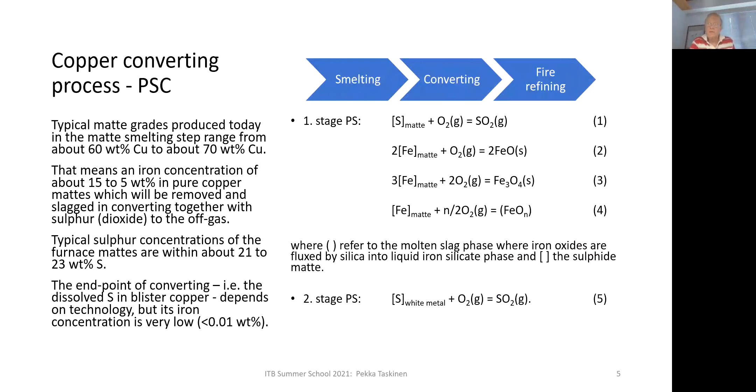What kind of slags are we using in the converting step? Now we don't have any more the gangue minerals which are in the concentrates. So we have only those materials in the converter charge which dissolve in the furnace matte. So we have typically,

along with copper, iron and sulfur, we may have nickel, precious metals, platinum group metals, we may have cobalt, antimony, bismuth, and such trace elements, but no MgO, no alumina from the gangue, no extra silica from the gangue. They are all already dissolved in the smelter slag and removed from the raw material feed of the converting step.

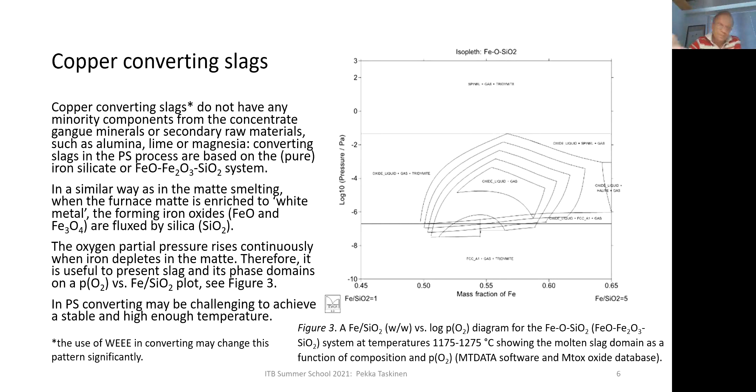And this is what we can adjust by selecting endpoints and operation conditions, how oxygen is blown and how much time is given to settling and separation of phases, and how long the oxidation is carried out in each step. So this is about the skill of operator and the plant. What is the local practice in operating a furnace, in this case Peirce-Smith converter.

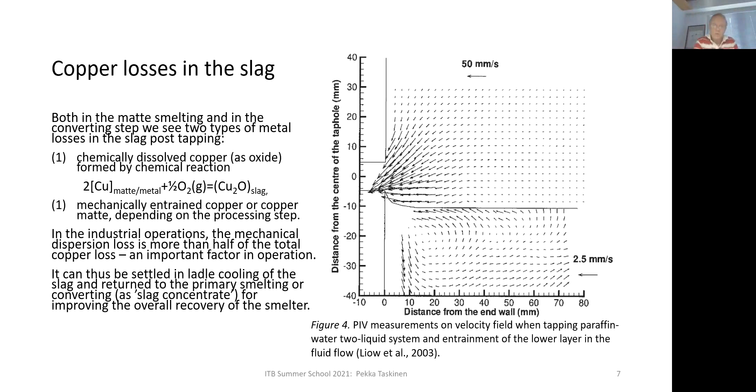So let's have a look at the converting products then. As I mentioned in my earlier slides, we have a batch-wise operation. All these sub-steps are taking place in the Peirce-Smith converter. We have several slag blow steps, typically from 2 to 4, even 5 in industrial smelters, each of them producing slag and SO2, and silica and coolants are added, and once the charge amount is reduced and some slag has been removed, meaning iron from the matte has been removed, more matte is added, more reverts are added during the blow.

And more silica is added for slag making, and these slag blows are producing slag which, except the last one, is going into slag cleaning operations. And after the last slag blow step has been finalized, the converter is now full of white metal, and in the copper blow the residual sulfur is being oxidized.

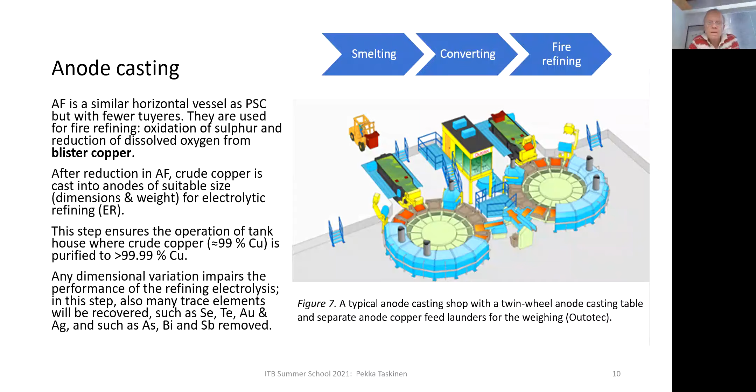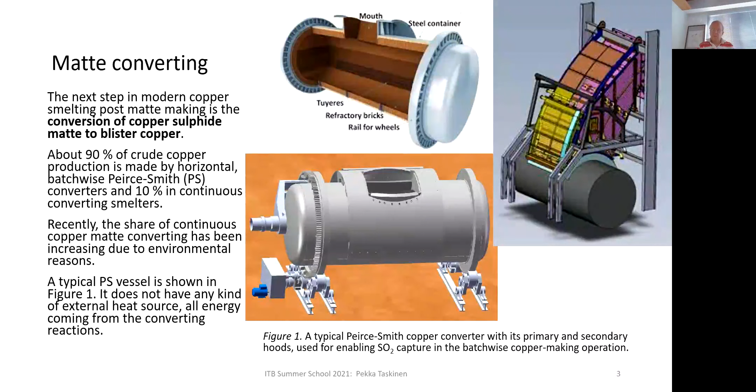and that is why continuous converting operation would lower emissions. It would generate more uniform product for the converting step, and this transfer of materials in the smelter by cranes, molten material, fuming material, ladle transport, would be removed from the smelter operation. So better hygiene, better environmental performance, better quality of the product. These are things which are favoring continuous converting technologies.

We have today 2 industrially used continuous converting technologies, and slightly older is the Mitsubishi technology, which is used in Indonesia today, and it is based on an idea that we can move materials in covered launders, ventilated launders, from one furnace to another furnace, which is a bit lower in its location, and further on into 3rd and 4th furnaces without any cranes, without any ladle transport.

And this Mitsubishi technology was developed in the early 80s, and it is based on a bath smelting process in the smelting step and in the converting step. So this is one technological solution, and it is used in less than 10 smelters in the world today. And from a thermodynamic point of view, the converting step is rather unique.

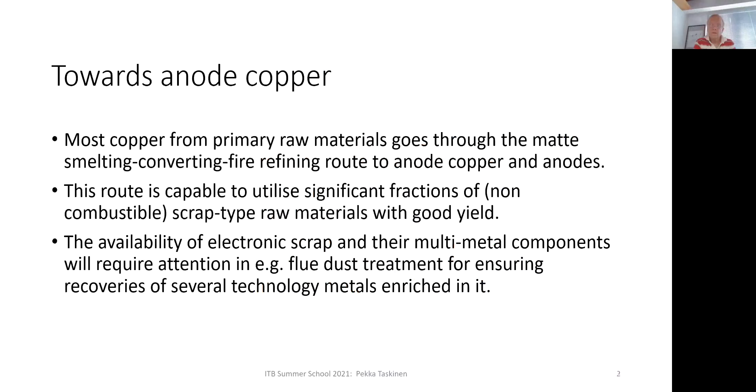So this means that Mitsubishi technology needs a different type of fire refining step, which is capable of removing much higher sulfur concentrations from the blister copper than Peirce-Smith converting. So this is one option, and this is very good in terms of environmental aspects and on-site hygienic performance. I have been in Timmins in this kind of smelter in Canada, and it was an extremely clean place, without any fumes or SO2 leakages. So this is one option.

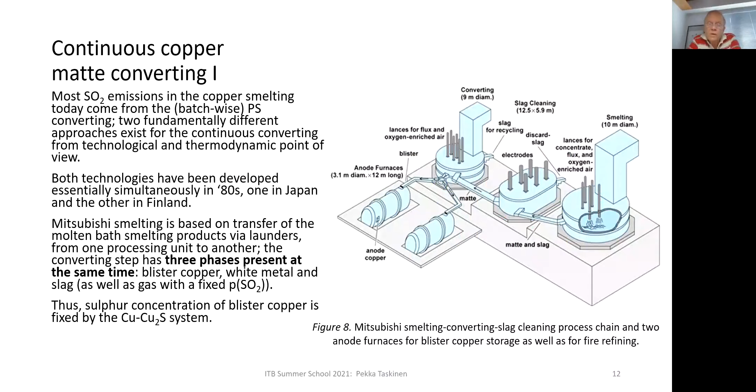What is nowadays more preferred, for one reason or another, I don't know, is the technology called flash converting. So in flash converting, we are using solidified and ground flash furnace matte, which is cold material, can be stored at site in big heaps, and when that is ground to suitable fineness and fed in a flash furnace with pure oxygen, it can be oxidized directly to blister copper and slag.

These flash converting furnaces are much smaller than flash smelting furnaces, and they don't have three layers; they don't have a matte layer in between slag and blister copper. They are operating in two-layer mode, and that is why the sulfur content of the forming blister copper can be anything. It can be saturated with matte, which is more than 1%, but it can be oxidized down to 0.2 weight percent. So then we don't need any specific fire refining technology for treating that material anymore.

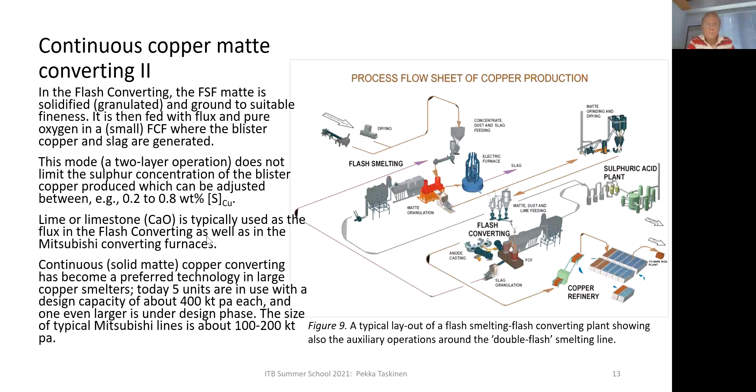So what happens in the flash converting furnace? We have a similar type of concentrate burner, which is distributing the solids, mixing the gas with solids, and making the suspension here, and it is ignited by itself by the heavy radiation and hot gases of the reaction shaft. So we burn all sulfur from the matte. We burn all iron from the matte and generate SO2 and iron oxides.

This is fundamentally the same chemistry, but from a rather different type of raw material, because to keep the amount of slag in flash converting on a low level, the material fed into the reaction shaft contains about 70% copper. So the matte grade of the flash furnace matte is about 70%, and on one hand, that is enough sulfur and iron to make the combustion take place in the suspension, to make it homogeneous. No extra energy, no extra fuel, no oil is needed to keep this oxidation step running and generating all heat for the whole furnace, compensating the heat losses and so on.

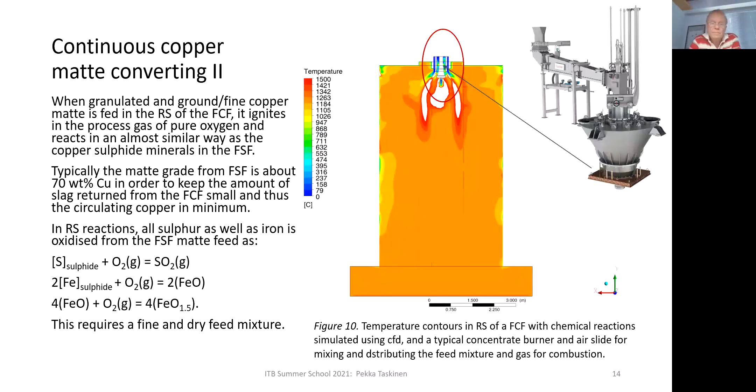So what kind of slag is calcium ferrite slag? What kind of slag is formed if we flux iron oxides with lime? And it's important to know how copper is dissolved in this slag, because that is actually the driver, the carrot, why we are using lime fluxing. And lime fluxing comes from the fact that, at the same oxygen partial pressure, at the same temperature, it dissolves less copper chemically, and this is one important feature of calcium ferrite slags.

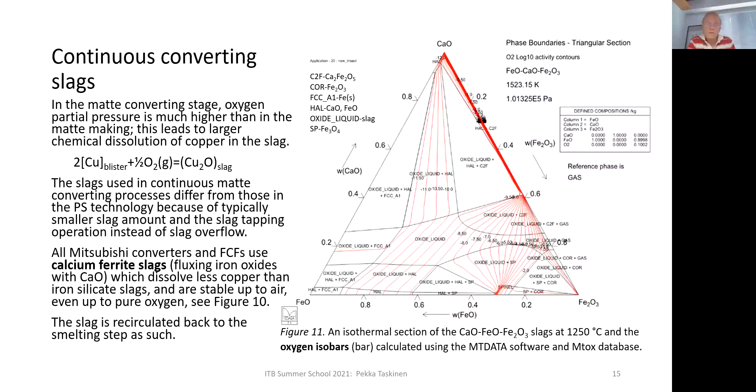As mentioned in my headlines, I will talk also very shortly about one-step copper smelting. One-step copper smelting is a rarity. You can produce copper in one step only from a very small number of ores and concentrates. And we have such rare examples in various parts of the world where we have either very high copper concentration in the ore or very low iron concentration in the ore. So in such cases, when we have little iron compared to the amount of copper, we can produce copper in one step without converting, without smelting in between.

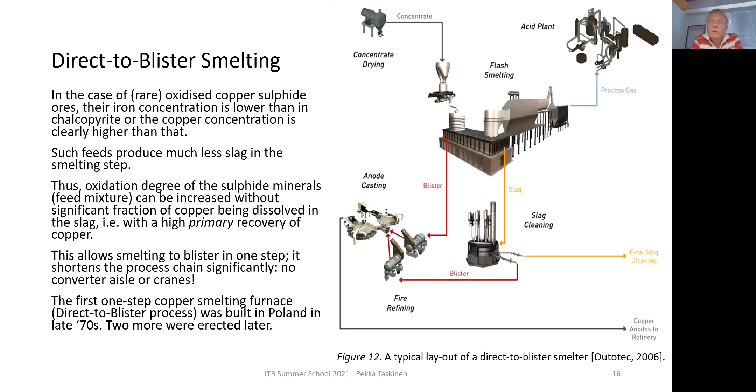So there are lots of positive features in direct to blister smelting, but the weakness of this is that normal chalcopyrite type concentrates cannot be smelted here economically. They are not viable. So all these 3 direct to blister smelters are flash smelters,

and in the reaction shaft the oxygen coefficient, which I explained on Monday, oxygen volume per ton of feed mixture, is much larger than in matte smelting, because we are now oxidizing all iron, all sulfur, and everything is taking place in this reaction shaft, during the so-called free fall of the feed material particles together with the process gas, which is heavily oxygen enriched air.

So this means that all gangue minerals present in the feed mixture, they are present in the direct to blister slag. So this may be a problem, this may be a challenge at least, and it is a challenge. And this also means that as we are producing metal copper with only some sulfur in it, our slag chemistry must be such that it dissolves all these gangue minerals, and the slag is stable. It is modified in such a way that it is stable at high oxygen partial pressures.

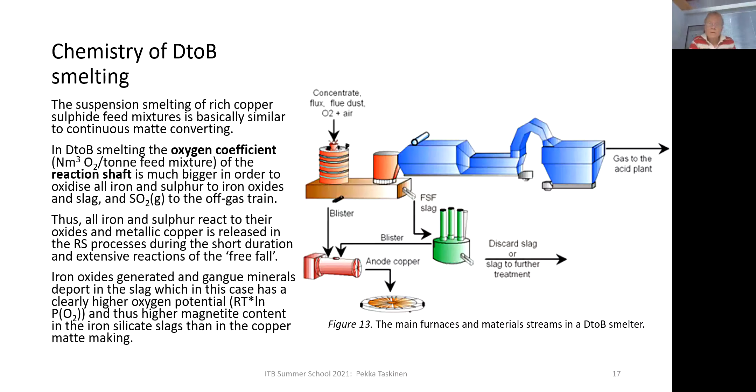So this is a much more tricky fluxing situation than continuous converting, for this very reason that all the goodies coming through the feed mixture, they deport in the slag. And this is because all those furnaces are delivered and designed by current Outotec or Metso Outotec.

So we have been analyzing what kind of slags could be used and will be used in these smelters, and it appears that these direct to blister smelters, depending on the feed material, can be run on calcium ferrite chemistry, but they can actually also be run with iron silicate chemistry if the gangue minerals are suitable. And then probably we can also use something called calcium iron silicates, intermediates of iron silicate and calcium ferrite, which are not used in any smelter yet, but it may be possible.

So in these iron silicate chemistry cases, we have somewhat higher copper concentration in the slag, but it has appeared that this cleaning step in electric furnaces is rather robust and flexible and fast, and it doesn't very much limit the productivity.

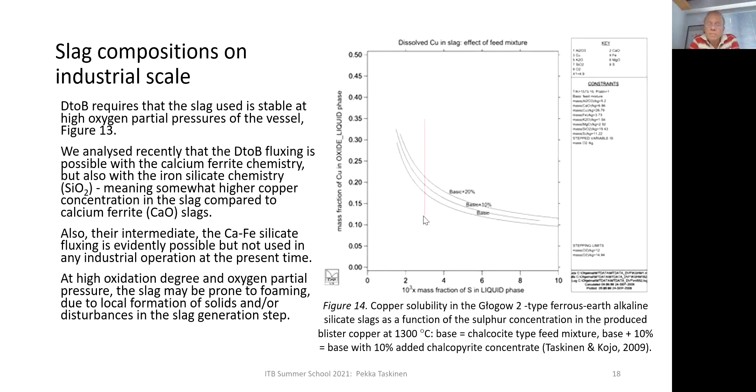So this is an example from that Polish smelter, which is using modified iron silicate slags, and their operational point is 0.3 weight percent sulfur in the blister, and in various feed mixture options, that iron silicate chemistry, which has rather much alumina in it, is producing slags with about 20% copper in it, and in the KCM smelter in Zambia, probably we are at around 15% copper in the slag at the same sulfur level in the blister.

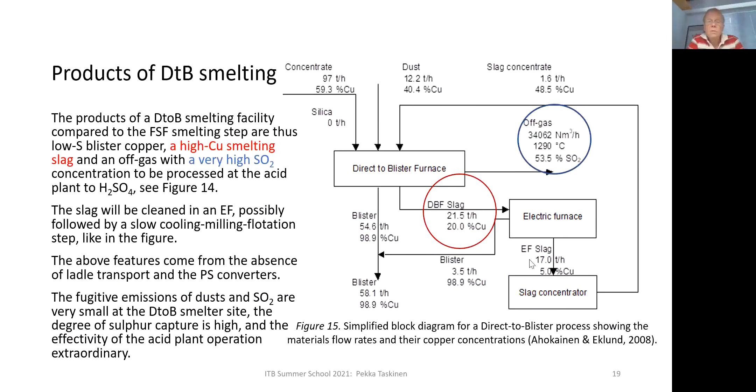Okay, Pekka. I think we have now plenty of time for discussion, questions, and comments, because normally, like yesterday, we are running out of time. Still get a lot of questions. Okay, guys, thank you. Please ask questions. Don't be shy. Okay, I see some face here of my student. Okay, first questions. Hello, Sima. How to ask a question? Okay, Abrar. Yeah, if you show your video, if you say something, I will directly know you. But if you turn off your video, I don't know who you are. So Abrar from Indonesia, I think. Yes. Of course, because you are my student. Go ahead.

Hello, Pekka. My name is Abrar Temula from Institut Teknologi Bandung. I want to ask you about Peirce-Smith converting. In PS converting, there are two steps of slag blow. My question is, is it possible to do it in just one step by adding more quantity of matte, silica flux, or another component in just one step of slag blow?